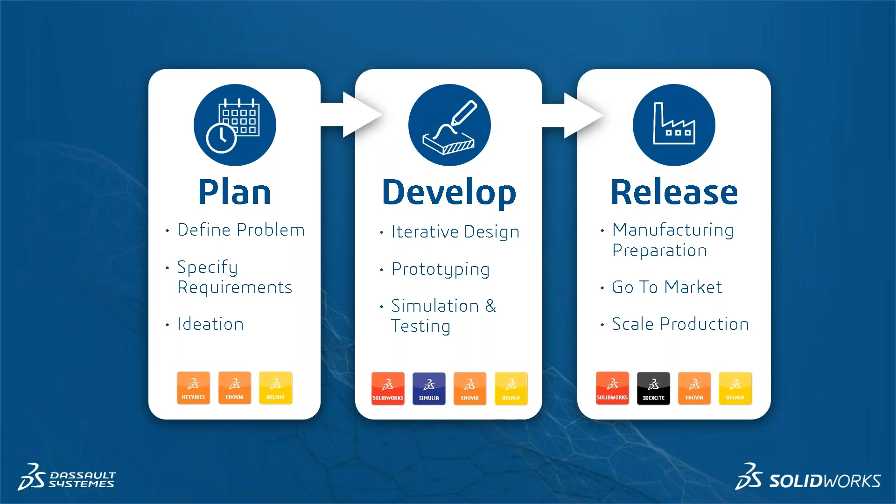So what does that product development process look like? In its simplest form, it's planning, developing, and releasing a product. We all know how well SOLIDWORKS tackles that second step by developing and iterating on your design. But as you see here, the other apps come together to fill in the gaps to provide a one-stop shop of connected solutions.

So today we'll be focusing on the SOLIDWORKS brand with emphasis on the release phase. Because as we prepare to go to market, we need nice, stunning promotional imagery, and we can create this imagery from our virtual designs made in SOLIDWORKS.

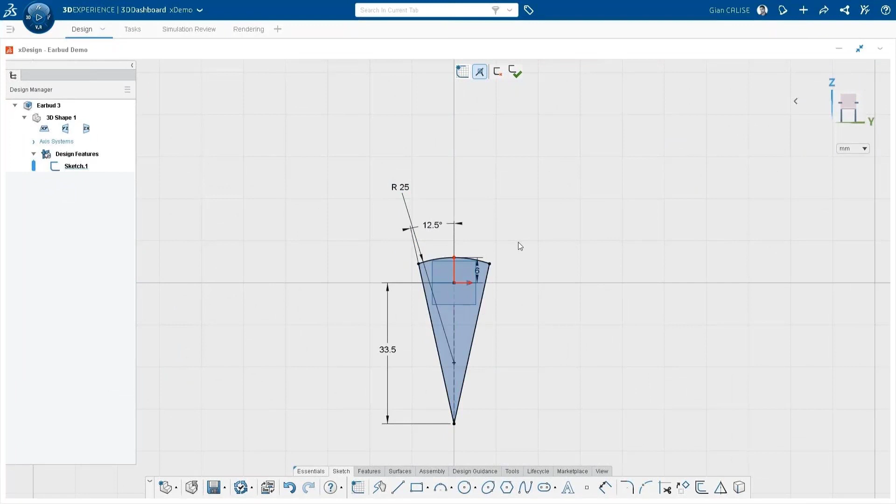So I'm going to start with the earbud itself, actually making the stem, I'll call it, of the earbud, that kind of elongated portion. I'm going to start by making a loft, using some of our basic sketch commands here. We have our three profiles to build our loft, and we're just going to grab those to put them in our dialog box. I just used a series of new planes and convert and offset entities to make that.

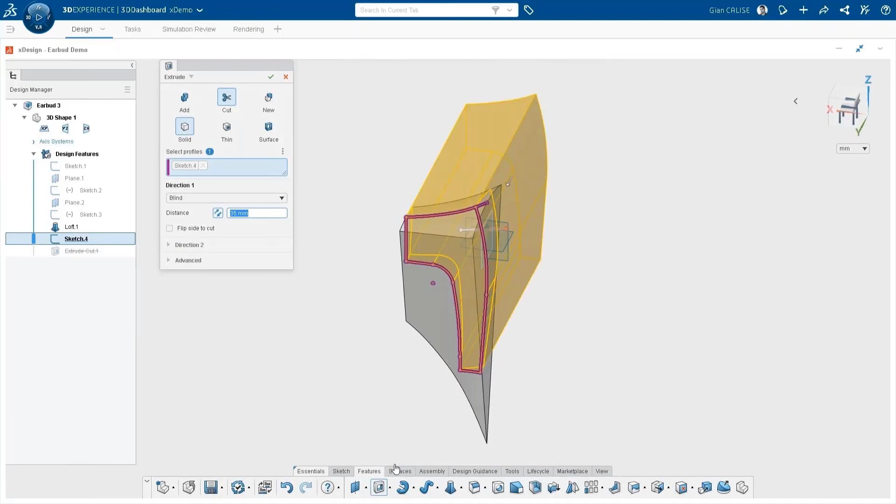Now another sketch just to cut away the outside. We're going pretty quick here, we just wanted to do a recap of what the design was really like, what it entailed.

For this design, I actually used XDesign for parametric modeling. I used some parametric features that you just saw to create the stem. Then I used X-Shape, our subdivision modeling tool, to create the bulb, I guess you could call it, or really the part of the earbud that needs to be a very nice organic surface that will fit into the ear very comfortably.

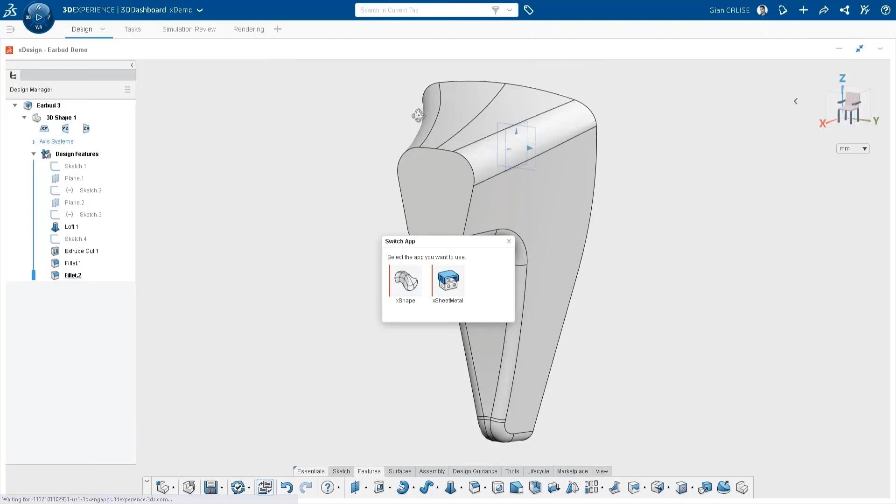Like Mike said, we covered a lot more of that design process in a previous webinar, but just showing you the basics right now. We start with primitive shapes in X-Shape. In this case, I start with the box. It's just inherently different than your typical parametric modeling, because now we're starting with 3D.

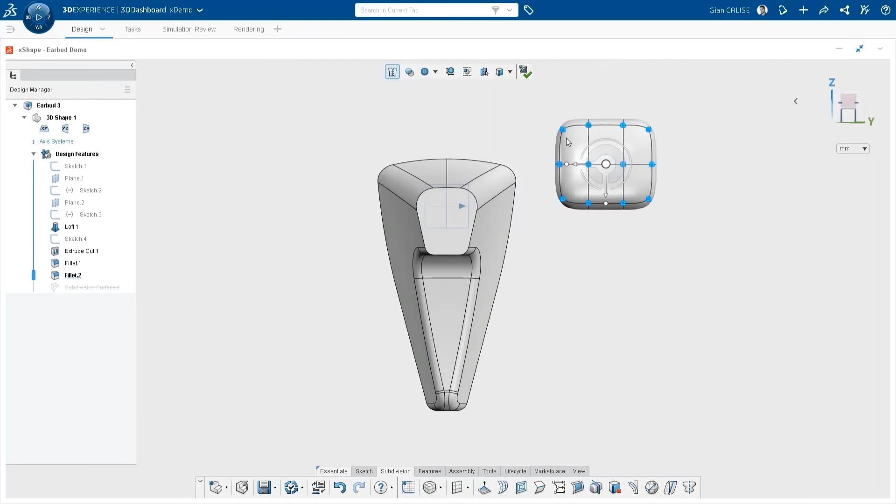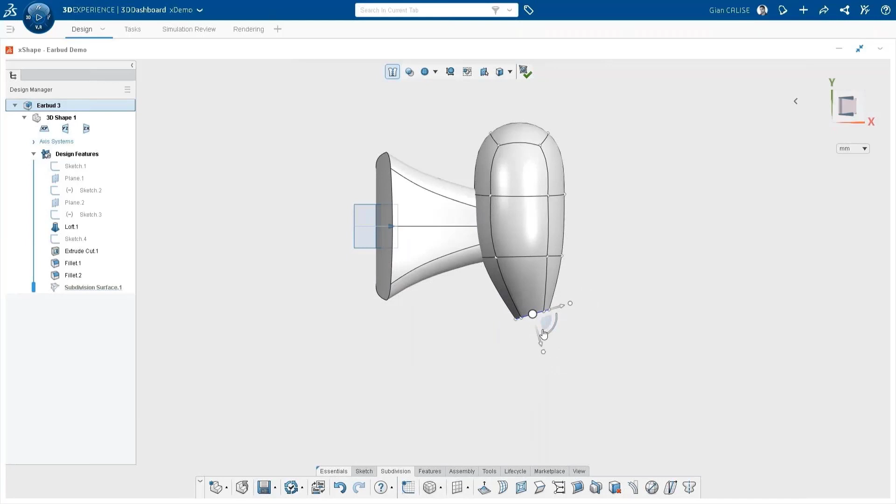We're just pushing and pulling to place different vertices, faces, and edges until we get the shape we're looking for, using that triad, or the robot, as we call it. We can adjust faces, edges, or points using that robot, and we use it to scale with those dots, and then to translate and rotate using the arrows and arcs you can see.

We can even adjust the orientation of that robot tool itself. You can grab the entire body. I'm just box selecting, window selecting here, and pushing and pulling little bits at a time. But that just about covers the X-Shape use in this.

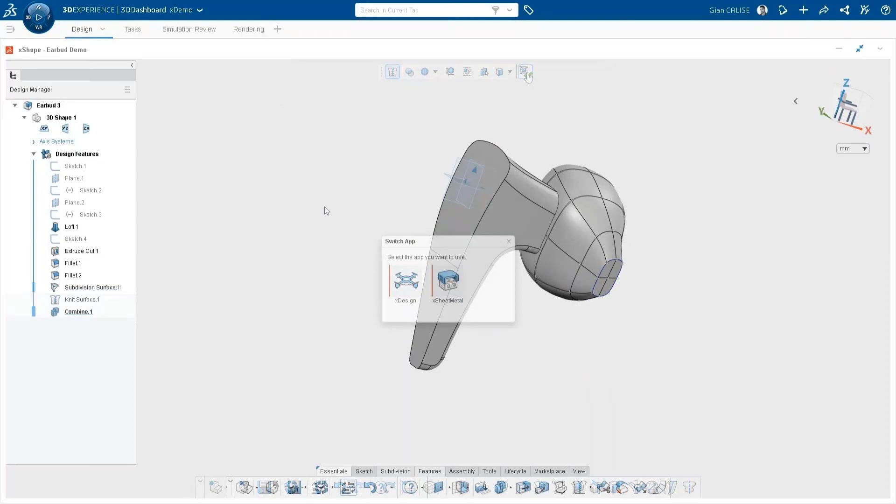So when we're ready to switch back to XDesign, now we're just combining these two bodies, a simple combine, just like in Desktop SolidWorks. Now I have one body, and I'm just going to soften up that edge between them with a fillet.

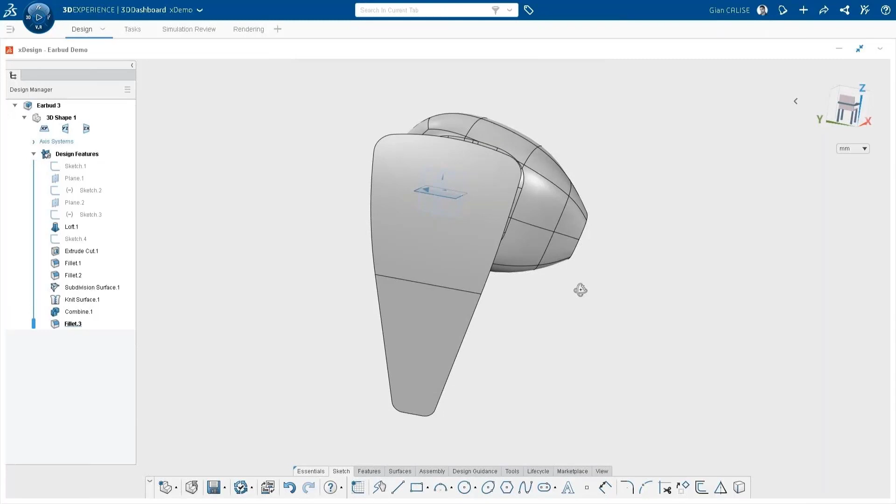That's really a high level overview of how we got this case to where it is. Now this isn't every single feature, we did add a couple more basic features that you'll see Mike use in the model, but this is where I pivoted to start on the case.

I actually used the earbud itself to design the case by bringing it into 3D Experience SolidWorks, and then using it as a reference when I wanted to create the insert for the case, the part of the case that the earbuds actually sit inside, nice and comfortably.

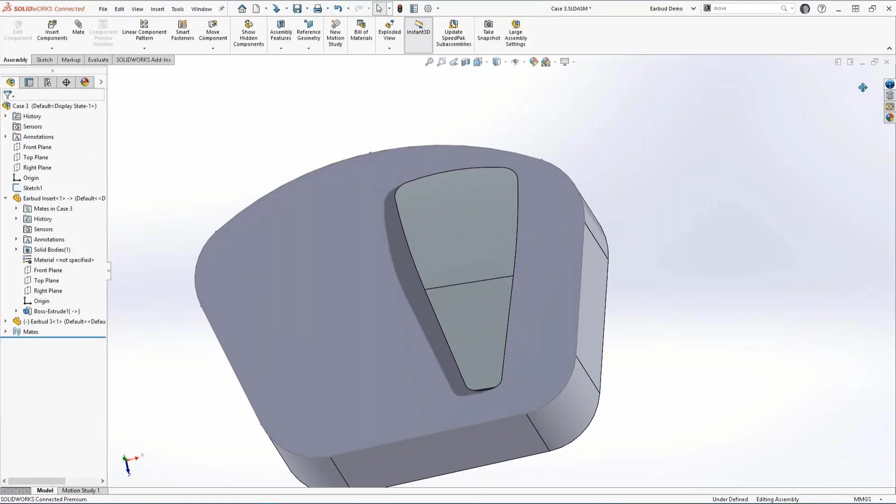We did that by bringing it in, and now just cutting using the surfaces of the earbud itself to drive our different features. And then in the case where we have kind of the top part, this top cut done, now we need to actually continue and cut down all the way to that bulb.

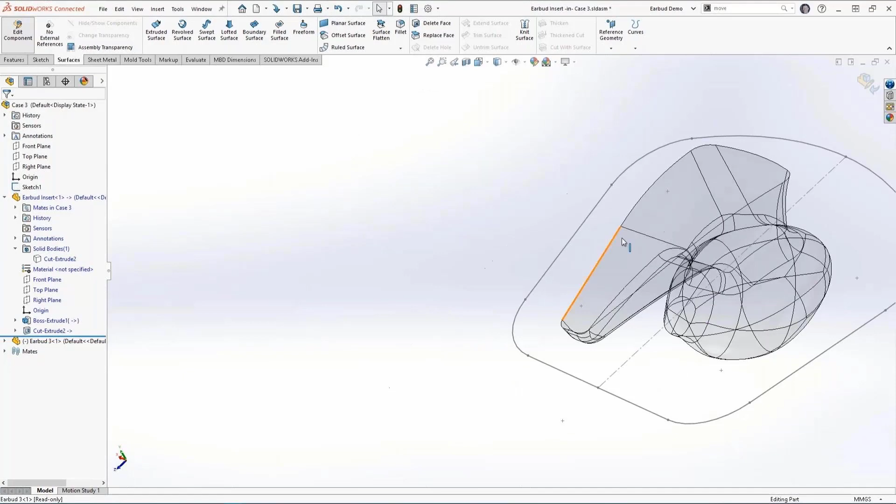But we don't need to cut the whole thing, so we're just going to create surfaces. We're going to use an offset surface on the earbud itself to define where our cut is going to go up to, our next cut, to create the insert that the earbud is going to sit in.

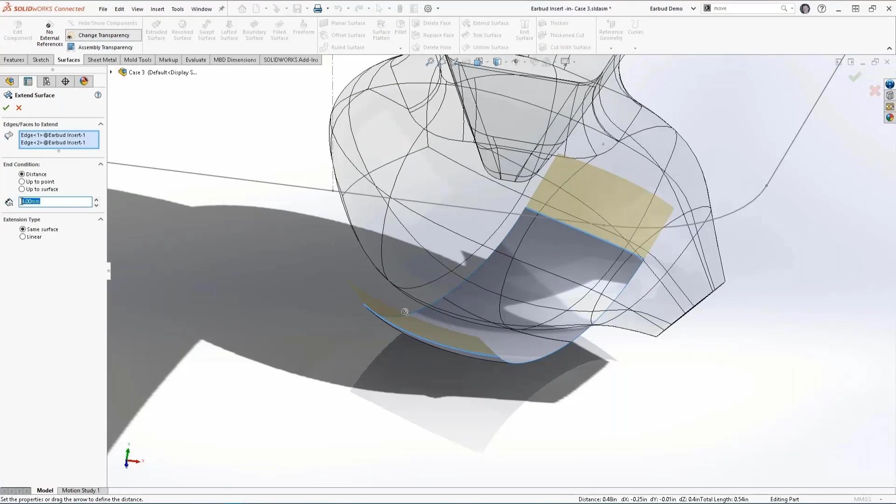So just manipulating this surface to get it to the point I need it to be. I want it to at least encompass the size of the top part of that earbud that we see selected right now in our selected contours for this cut. But now once I'm ready to use this surface, I have my cuts in there, and now I'm just softening up edges and adding final features.

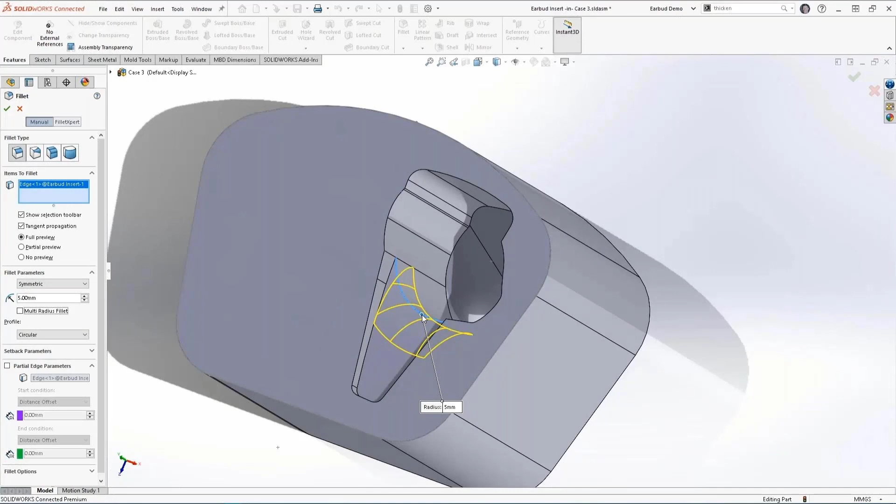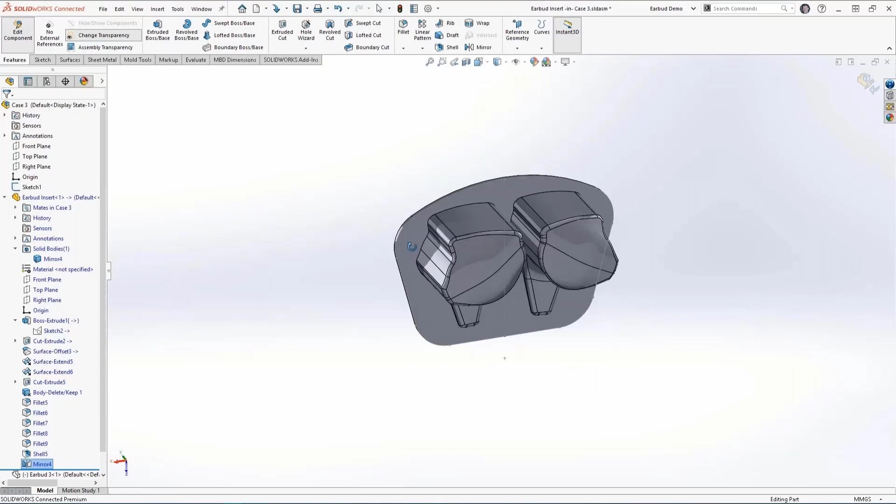That's just highlighting how we were able to use multiple different CAD tools in conjunction, in tandem, to come up with this final design that uses multiple different CAD products. And then we shell it out, we mirror it, and now we're well on our way to that case insert part where the earbuds are going to sit. This is my favorite part of making this model, was making that insert.

So let's fast forward, our case is done. We have the top and bottom pieces as well. Those are pretty simple - if you're a SolidWorks user, I'm sure you can imagine just how easy it was to make those. But I think now I'm done with this case.

So I'm ready to reach back out to my design team with Mike and John here, because we need some renders now. We need to put some content out there, some nice, cool imagery to generate some hype, some buzz around this new set of earbuds we're hitting the market with.

So I know John has color swatches, and I know Mike, he's the visualize expert here, so I'm going to see if he can handle that. Looks like John's got the first color swatch. We can see this in our collaborative community that we're interacting in. Looks like Mike's up for the challenge too, and now he has access to all the color swatches and everything he needs to get going on these renders. So Mike, how are you feeling? You think you got everything you need?

Oh, Mike, I think you might be muted.

There we go. I was just commenting, it's really fun to watch how that model came about - to see X Design, X Shape, which are part of those 3D Creator, 3D Sculptor roles, all through desktop, through the cloud application, so browser based, but yet bringing it back down, right? It's connected to the desktop ecosystem. And really that's what I wanted to hit on, right where you left off with your design and getting into the visualize connected side of things.

So as you mentioned, using the 3DSwym community that was created for this group, you tasked me with this. I was able to log in right away, get flagged saying hey, I got some work to do - and of course I'm excited to do it. So using SOLIDWORKS Visualize Connected, I actually launched that application right from the same place we launch all of these different applications. Some are browser-based, and in this case it's a desktop install, but connected to all the data that we have on the 3D experience.

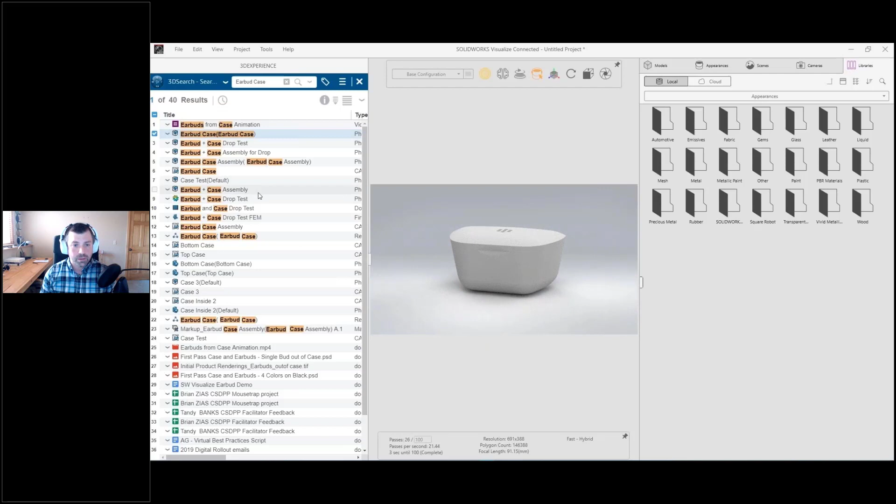So it really can save a lot of work for the guru who's doing the CAD stuff and rendering stuff - we can speed things up. So I'm going to go ahead and bring it in, and just like that, this looks good - looks like the right model. The next thing I want to point out is over on the 3D Experience side, you'll notice that the Visualize project is made, and it's created a reference to the CAD data itself.

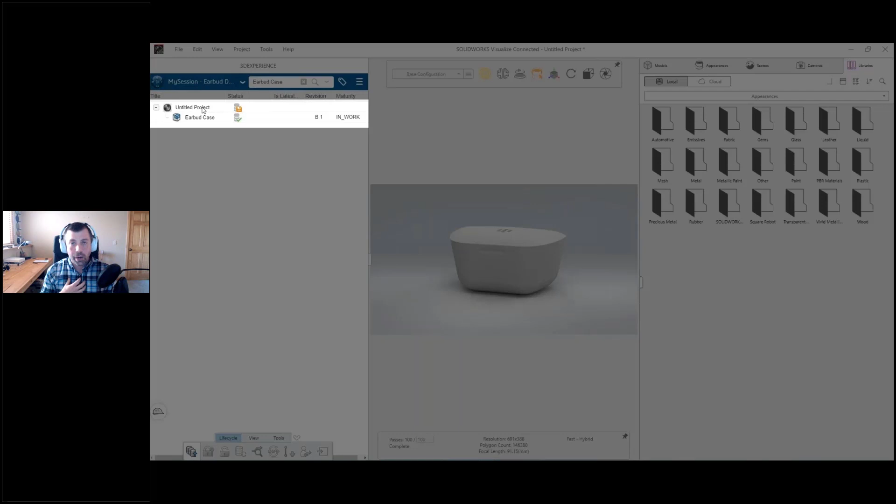What's nice about this is it still shows as in work here. So maybe we're close to that release stage, but not 100%. As you start to go through and modify the geometry, I would get notified as a Visualize user and see those updates.

I could update my project and bring in any of the geometry changes. So active reference right there. I'm going to go ahead and save this. Once we've done this, I'll fill out the save card and add a new comment into this revision. In this case, just new project.

So as we go through, even though I'm working on Visualize local to my machine, all that data is being pushed back up to the cloud, being backed up, safe, secure, and collaborative. We can share this with other users.

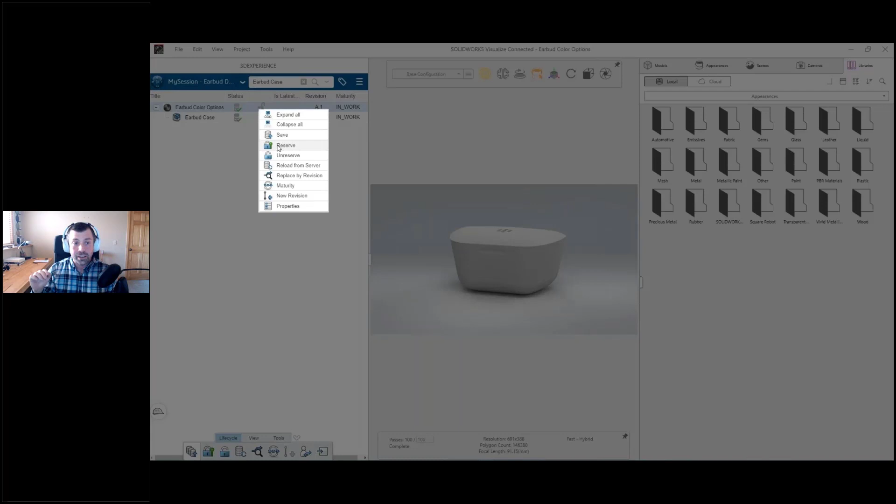Now, one more step here, just to make sure that John or Gian or anyone else doesn't get excited and jumps into my project, I'm going to reserve it. That just locks it, gives me only access to write. And this is the very same interface you would see with the SOLIDWORKS connected data set as well.

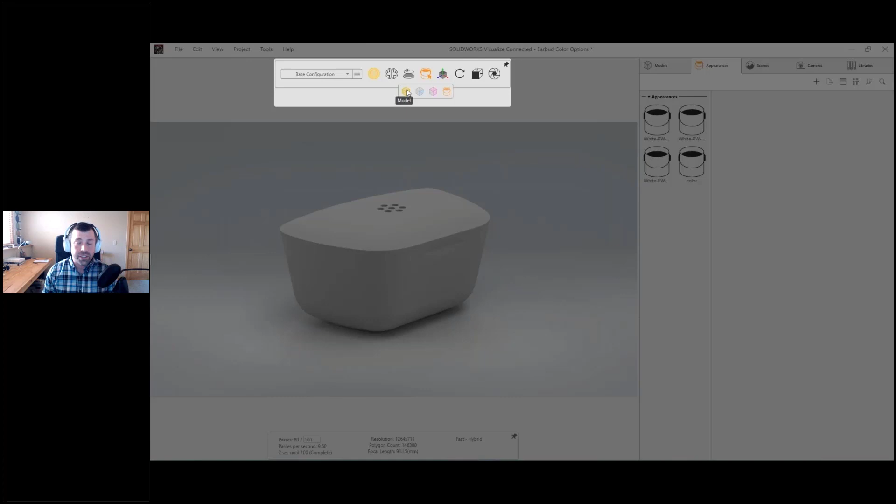So now I'm inside of Visualize. I want to point out a few things I use commonly. If you're new to Visualize Professional or Visualize in general, on the very top we've got our toolbar, and this is really the guts of the software itself.

I'm going to do things like grab models or parts, different groupings depending on how it's structured, or even the appearances, just by my selection tool. In this case, we want to grab the lid. I want to make sure that's open. I don't have to worry about constraints of mates or understanding the mates that were in there.

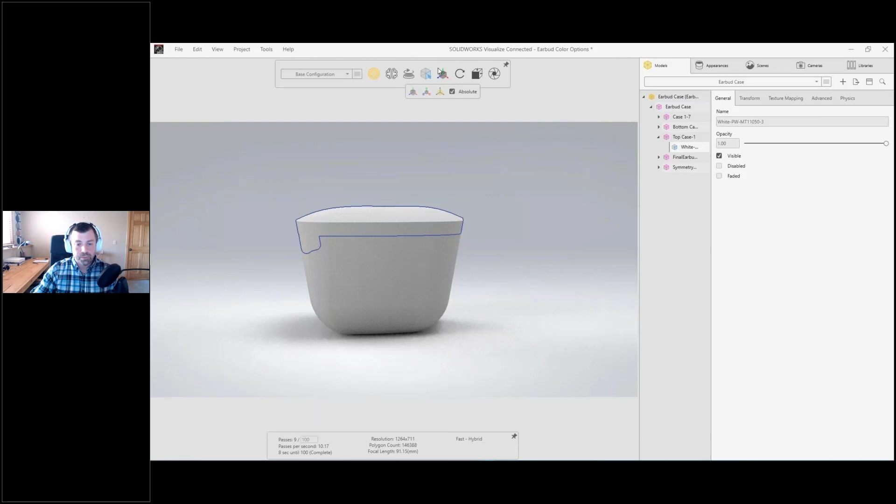A lot of folks that use this type of software may not have a CAD background, so things like just manipulating, just grab and move it. The other area of the software I use quite a bit is just the manipulator - things like translations, rotations, and scaling.

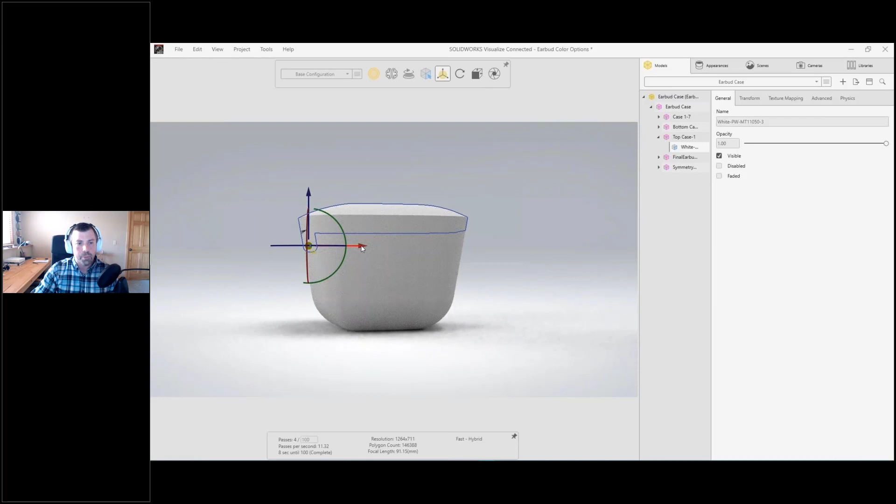In this case, we want to open the lid up. Now I've noticed that the spot where it thinks the middle is, is a little off - no big deal. We can actually reposition the pivot point, and that's what I'm going to do here: line that up right with where that hinge is, just like that. We can actually see the line, the hinge, or the cutout, and we'll just open it up, so just rotating the case open.

This looks pretty good. All right, so I've got that opened up. Now, next thing I want to do is just process some of the other CAD data.

I showed you guys the top toolbar. Over on the right-hand side, I'm working on the models tab, and I do a left to right approach. So I start with the model, and I start to see things like - Gian, you did a great job hitting a lot of these transitions, these fillets or rounds to smooth out the model, but there's a few that we still missed.

And this is really critical within rendering, because the human brain, if you see something in the real world that doesn't quite fit, we all say, well, it's a glitch in the matrix, right? It's your brain saying that's not right. And perfectly sharp edges like this are one of those triggers.

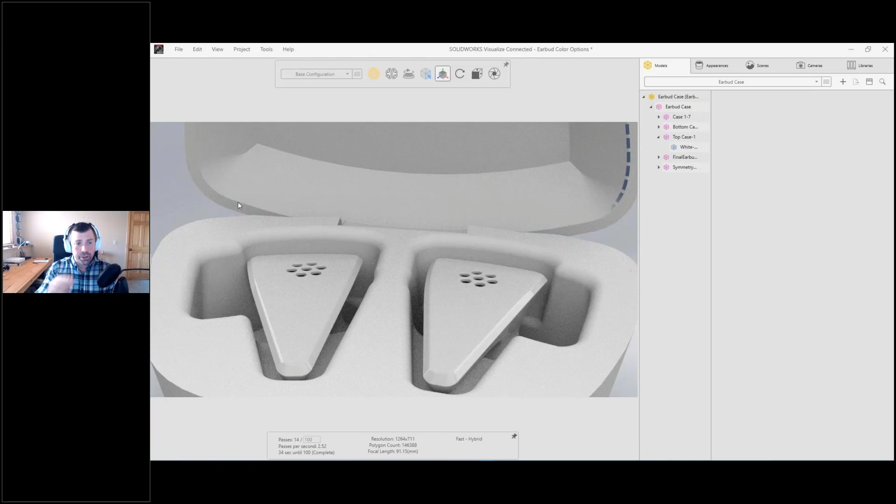So I like to soften those up, and I love this in Visualize. I don't need to go bug Gian to say, hey, can you add a fillet there? That's affecting the production model. No, what we're gonna do is just round that out and do that right inside of the rendering software - one-way bridge, we don't have to worry about affecting the CAD data. We can do that here.

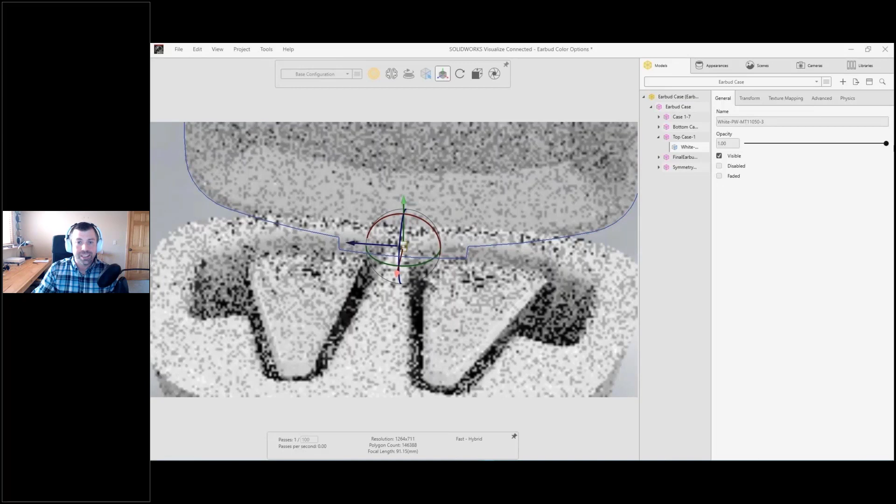But before we do so, I just want to show you on the right-hand side there are other ways you can modify the model - things like changing the opacity, so we can have that kind of ghosted out, a really cool effect if you want to do some transparency views and look inside of complex components. Standard transformations too, just things like rotating the model around, translating it - these are all built right into a quick UI.

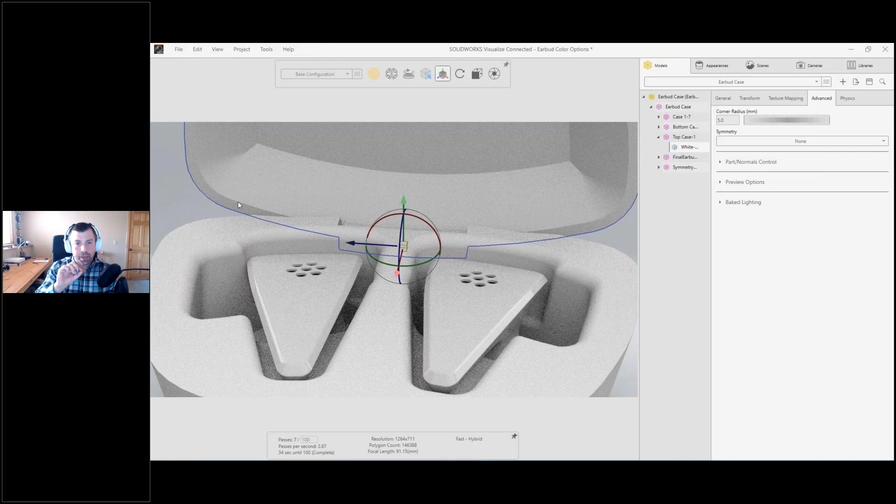Going back to that sharp edge, Visualize Connected allows this corner radius, and this is a great tool. It's a real subtle break that I put to that edge, but it just softens it up. I'll do that on a couple of the components. Here, we'll just go ahead and do another break to the overall inside of the case. And then finally, we'll make sure we're softening up the earbud itself. So again, modify geometry inside of Visualize, and you don't have to worry about bugging Gian or the model or any of that.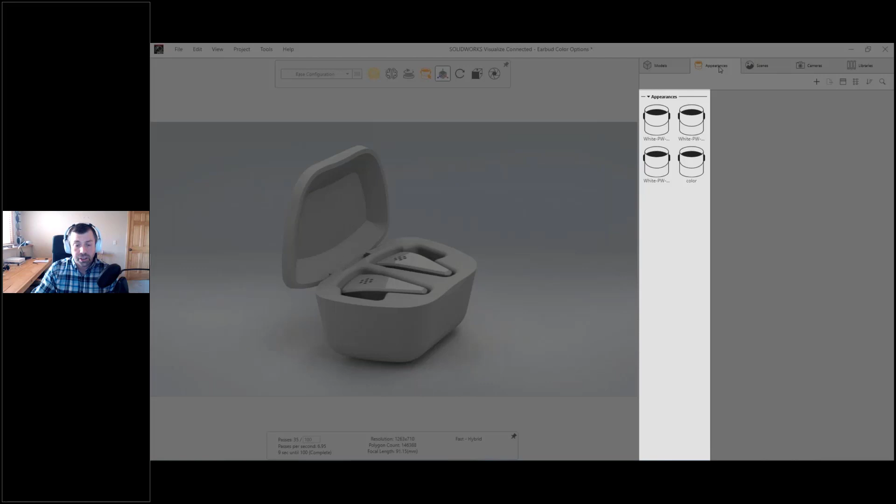Next thing we'll look at is on the appearances side of things. I actually have imported all of the appearances that were created when the model was done over in SolidWorks. We've got some mold tech finishes here, so that's a good starting place. You can either use these as is, maybe they're 100% approved materials, or you can modify them on the fly. So we'll do a nice little SolidWorks red to the case cover here. That's a good starting place.

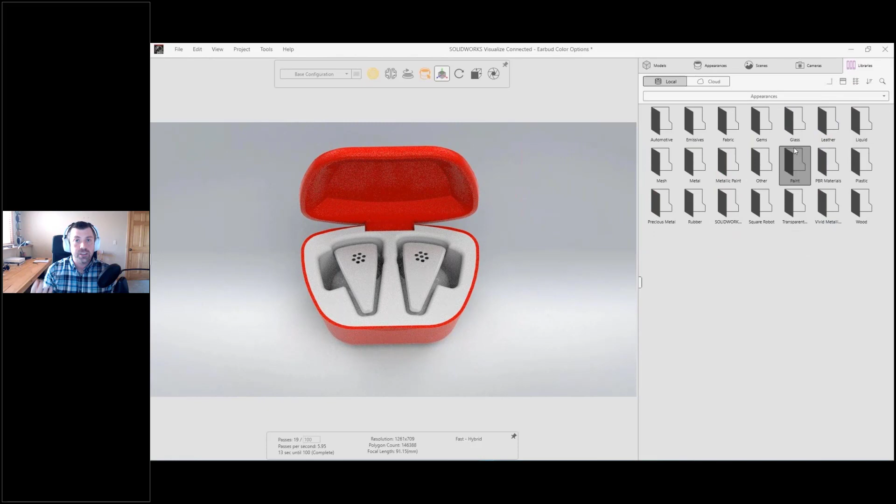The other area you can use is the material libraries from the default installation. It comes with a ton of different materials that you can add, customize, or use as is. In my plastics folder, we see we've got a bunch right here, I don't know, 50, 60 some materials in there. Application of these is just a simple drag and drop. Now, these plastics will actually have the color, they have a highlight color, they can have transparency to them. So they're pretty advanced materials, and they're specific to rendering, how light moves through them, how it bounces off of them, and so on.

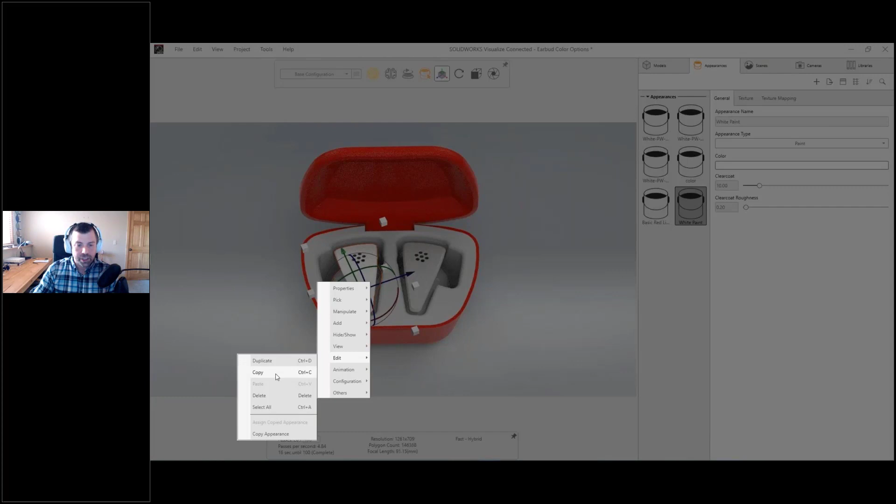So I'm gonna apply this new red paint. That looks pretty good. Let's go back, let's apply a few more. I'm gonna give the actual headphone itself, the earbud, a real nice white paint to it. And then I'm just gonna repurpose that. We'll copy that from one and we'll paste that onto the other, apply that appearance onto another one.

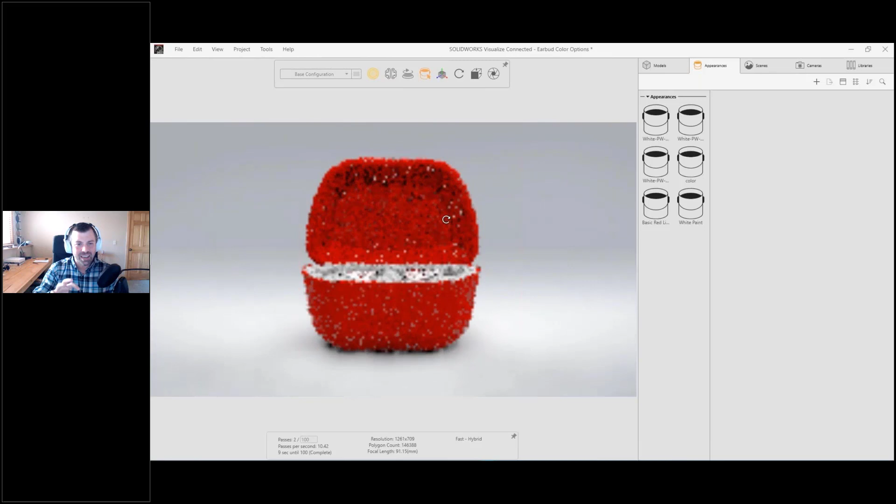And what Visualize does here, it actually will group those appearances together, and this is pretty slick. So once we have those appearances applied, it could be on two, four, however many parts of the model, I can always come back and just modify the color, the clear coat roughness, the clear coat thickness, or any of those aesthetics, on the fly. Get that all set up, and pretty quick, we're pretty much right around our way.

All right, the last place I want to go through in the setup process is adding some branding. Now, again, I mentioned that if this was done in the CAD stage, so Gian, if you would have not been so lazy and added the decal, we would have brought that right in. Just kidding, my bad. We can do it here as well.

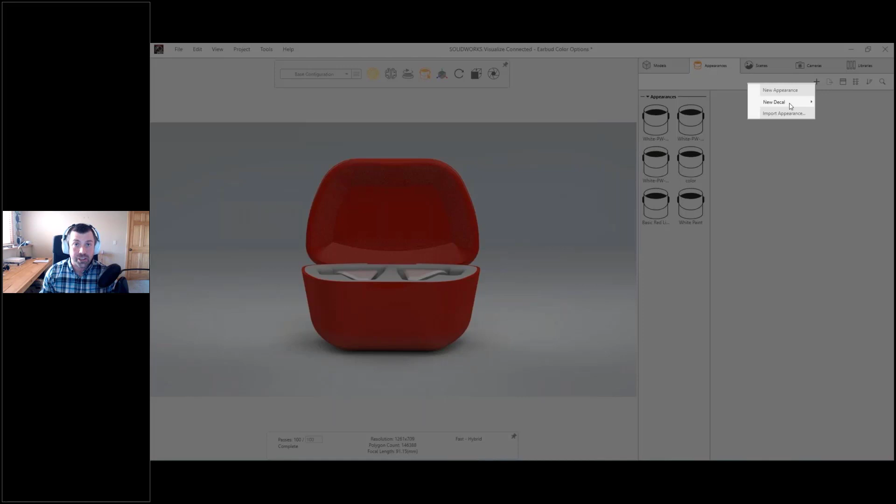So I can go through right inside of Visualize. We can add decals, and decals can be static images, they can actually be animations. So you could put an image up on like a cell phone working or so on. But we'll slap on just a little PNG, drag and drop, place this in the position, and we'll move that triad to get it positioned right where we want it to be.

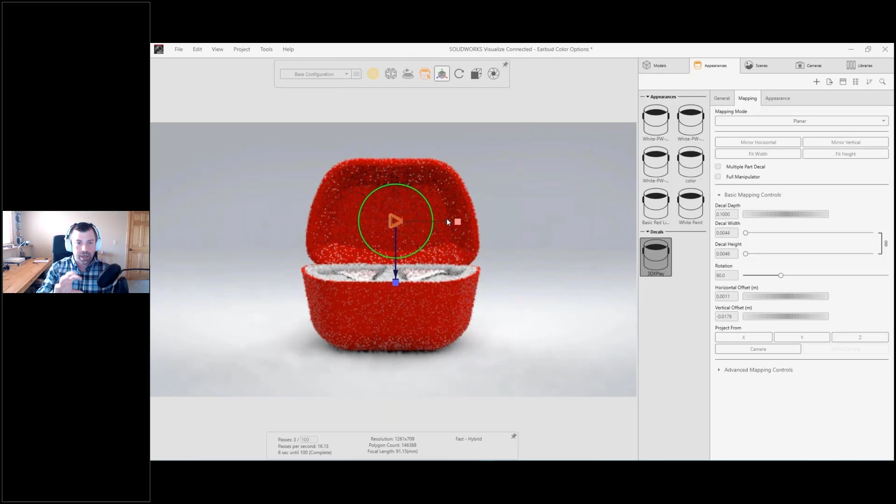All right, so let's scale this down a little bit. Again, just nice user interface. And I didn't point this out, but you'll notice that it's kind of pixelating as I modify it. This is because we're actually rendering in real time. So as I make changes to it, as I make adjustments to the model, Visualize is giving me direct feedback of what's going on.

Okay, let's go back over to the right-hand side, and you'll notice I've just moved myself left to right. I started with the model, modified some things, we opened it up, softened the edges, we applied some appearances. Next, we want to modify the scene, and this is really that virtual photo studio that we're working in. The scene that we have here was brought across from SOLIDWORKS. If you're a CAD user out there, you may recognize the scene. Oh yeah, that's how I design in CAD. Great, that comes across as well, and it's a good starting place.

You can also modify these. So what I'll start to do is come through and take out that backplate, which is just a standard image in the background.

We can modify things like the brightness. You can rotate the scenes. These scenes, or environments, have lights in them, and we can reposition the location of those lights just by rotating around, to really light up our product that we're going to be creating a rendering of.

One thing I like to go through, especially in product photography, is get rid of that 3D type effect and get just a solid color in the background. But you'll notice things like shadowing and floor reflections are all applied.

Visualize Connected out of the box comes with a bunch of different environments or scenes. Here, we could do a blurred studio, which gives a nice soft effect, drag and drop. These types of scenes are readily available online, with tons of websites where you can download them for free or pay for them.

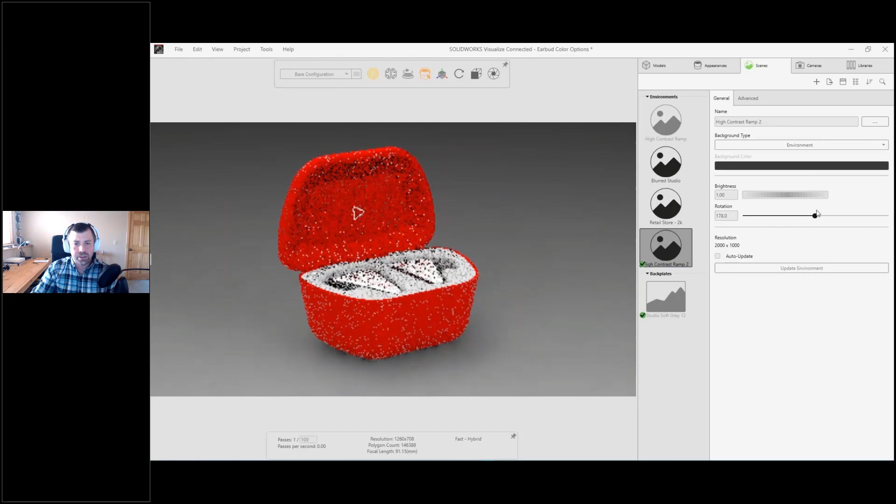Now I'm going to go back, and on that scenes tab, you'll notice as I apply them, those scenes all get remembered and added to the project. But I'm going to use this final one. I like that high contrast. We'll rotate that into position, and again we'll use that dark background to really make this pop.

I'll add a little floor reflection. So just going through some of the options in here. If you don't know what they are, no big deal - just slide things around. You're going to get feedback from the real-time rendering and see how that affects your overall image.

Now, the scenes aren't always going to be the perfect lighting, and as any photographer will tell you, it's all about good lighting. So one thing I love about Visualize Connected is you can create all these additional lights to your scenes, and it's really easy to do.

In this case, I want to add a little bit of light to that back case, almost where the branding is. But instead of manipulating and moving it, all I'm going to do is say, hey, pick target, and click on the face I want to light up. So as I select that, it puts a light out in space somewhere, boom, and it fires it in and lights up that face - just normal to, gives this really nice effect.

You can modify the size and style of lighting, the overall geometry. I like to use a long cylinder light - I think it gives a nice effect. That's just me playing around. Looks good, I love it. And pretty quick, we're ready to go.

So I grabbed Jian's model through 3DEXPERIENCE, brought it in, modified some of the geometry, added some appearances, created a light, applied a scene, and we did that all pretty quick. This is as real time as it gets.

So now I'm going to go ahead and save this - I want to make sure we got a good saving point. You'll notice I also have the release reservation after save option. Maybe I'm done for the day, headed out, and we want someone else to have access. We can do that, which I do here.

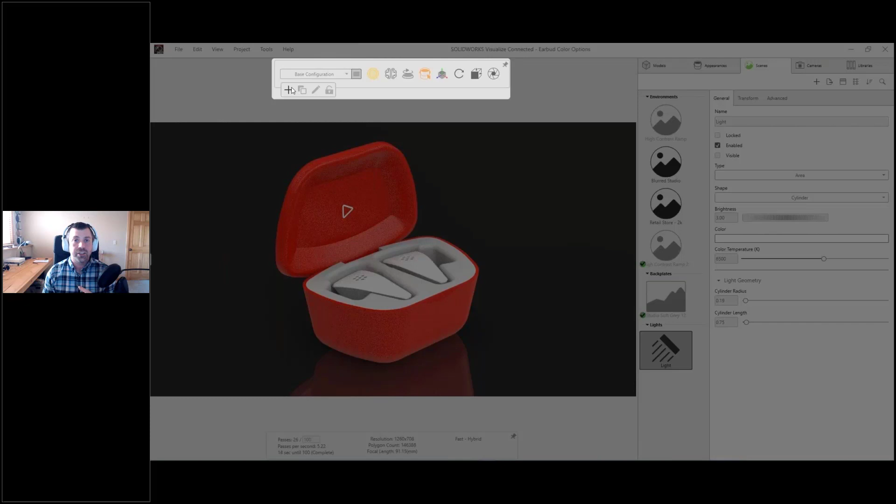And in this case, John, you provided me all the swatches I need, which is great. But maybe early in the design phase, or if you're communicating with your customers on the look and feel, this could be more than just colors - this could also be textures, transparencies, decal placements. All of those things can be done with these if-then configurations.

So let's create a few. I'm going to do a gray one, and then I'm just going to do a blue one as well. So we're just giving those a name. I use the GRAY spelling, sometimes I use EY spelling. I have no rhyme or reason.

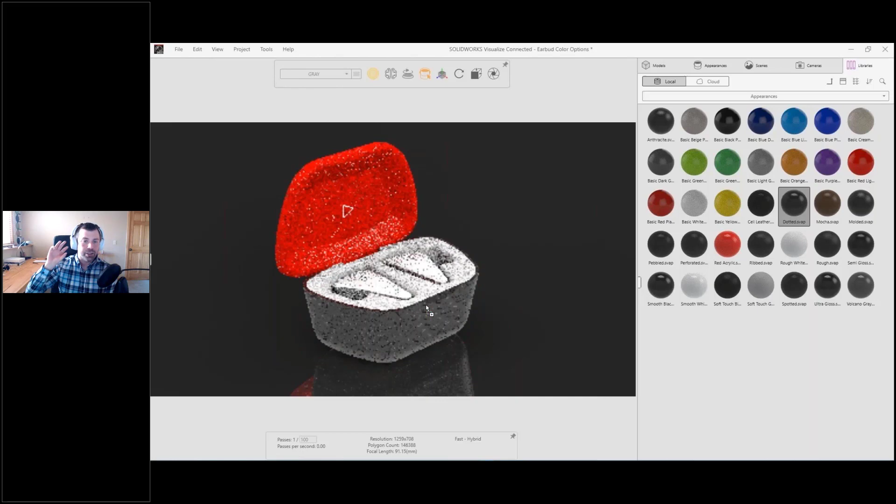From there, we're going to change this to gray and start off in my material library, same place we were earlier. Now I see a dotted one, but this is black. No big deal. You can use the library as a starting point, bring it in, and check this out.

I love this look because it's actually got like a 3D texture to it. Visualize fully supports displacement mapping, even what we call PBR textures, really advanced materials. We can use those in here as a starting point and modify that. I think this looks good, but it was outside of the scope of the work.

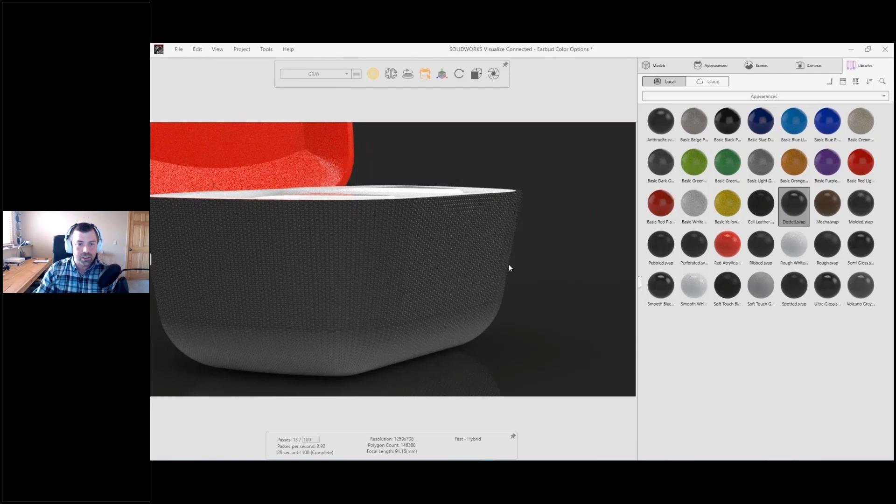So let's continue shopping for materials. That's what you're doing, you're just applying it. Does it look good? Do I like it? Drag and drop, finding something you like. So this volcano gray, I think, is a good fit. And again, that's going to be the color, but also the roughness of the model, the reflectivity of the model. All of those go into that appearance.

Now, in this case, let's go back over and we'll apply a little bit of a cotton to this, and then we'll jump up and switch over to my configuration. It looks like I lost a shadow box there. No big deal, apologize for that.

Now, what I want to do is, we all know how important branding is in terms of colors. If you have ever worked with anyone in marketing, they are very particular in making sure that RGB, that hex value, the CMYK value, Pantone, for any of those things, those numbers have to be precise.

So what I'll do is actually search in 3DEXPERIENCE, that task pane, bring this out, and we'll look for that posting information that John had posted earlier. You saw the full SolidWorks, the Dassault Systèmes brand colors.

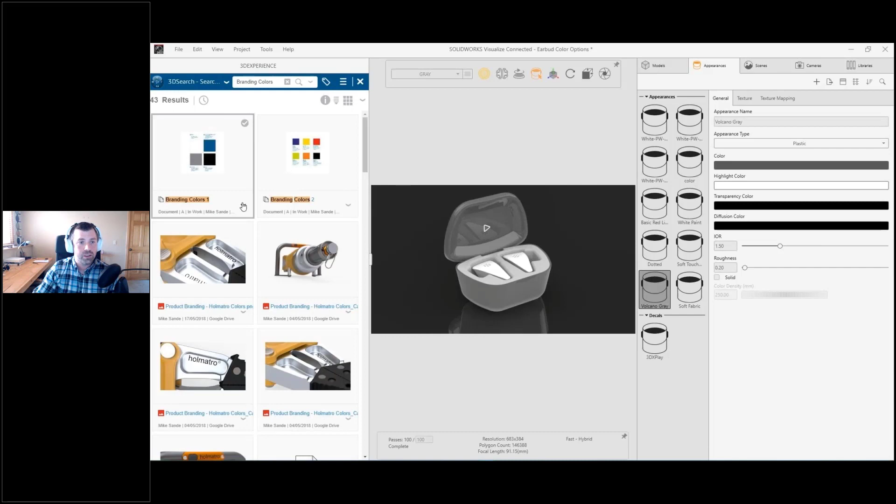So I've got 2 of the swatches. We'll go into the branding colors. I'm going to preview this. So again, non-CAD data is searchable, accessible right through the same pane. And I could grab the values, the CMYK values right from here. Or one of my favorite features inside of here is just using the little color dropper. We'll just extract that right from there. It saves me time, and I get that exact value.

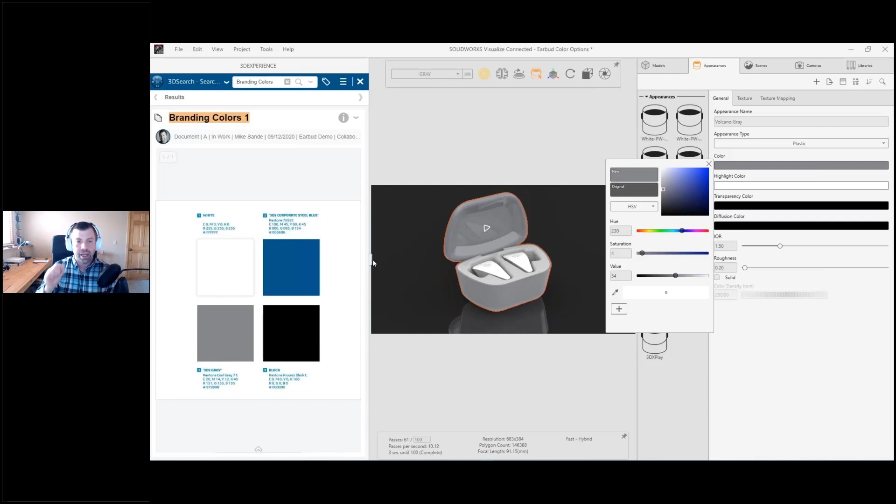So we'll go ahead and maybe grab the blue. Let's see what the black... Well, we wanted that gray, which is a little lighter than the volcano gray we had before. Let's toggle through. I've got 2 configurations created now.

We want to do 1 more. We'll just repeat the process. I'll bring in a blue. I could bring in any one of these, it doesn't matter, but I like that shininess of the blue. We'll extract out the right value of that blue. And now we can toggle through and see I've got all my configurations, and rinse and repeat. 5, 10, 100 of these, all stored in that project.

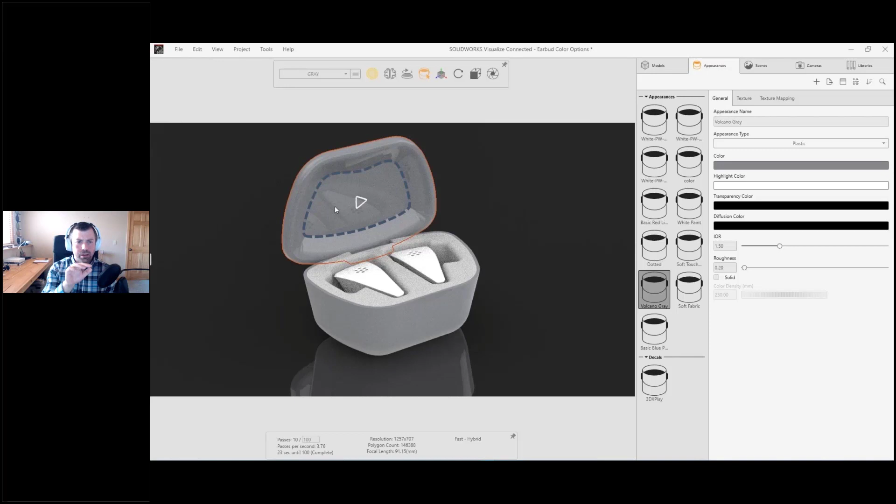Now going through, I did notice here that it has a little reflection inside of the model. I don't love it, so what I'll do is actually modify that just a little bit. Again, real-time rendering, just change the roughness. Think of this as going to it with like a 500 or 800 grit sandpaper just to soften that up a little bit. Going up to 1,000, we could polish it and so on.

That looks right. Okay, so we moved through models, appearances, the scenes. Now let's look at cameras. This is really where you bring that artistic fun of it. You can really start to be creative.

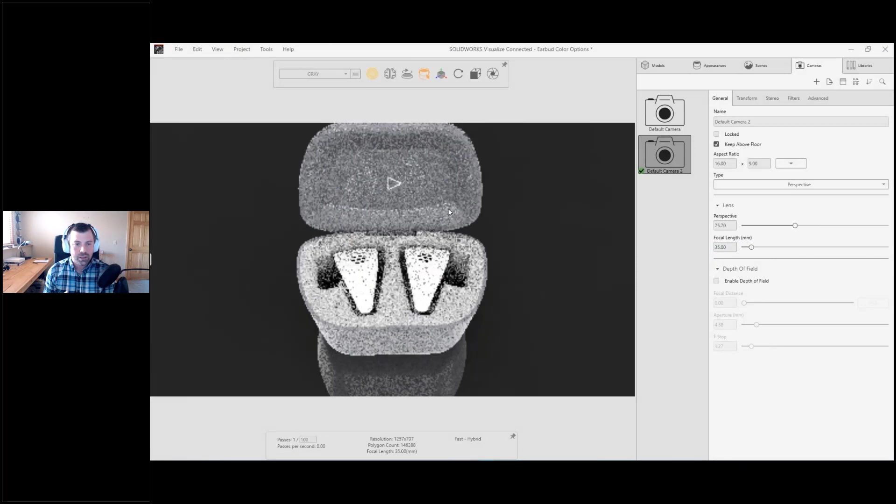And if you're not creative, a lot of folks out there who do this stuff say, I'm just not a creative person. No big deal, because you can take real-time rendering, move things around. What looks good, what doesn't? So here, when we come in, we'll get our top view, and I'm just going to start creating a bunch of cameras. I like that one.

I've created a wide angle lens, a 35 millimeter, just put that right in there. Again, slider bars, another way. Start moving around the CAD model. What looks good? In this case, let's go ahead and get a nice render shot of some branding.

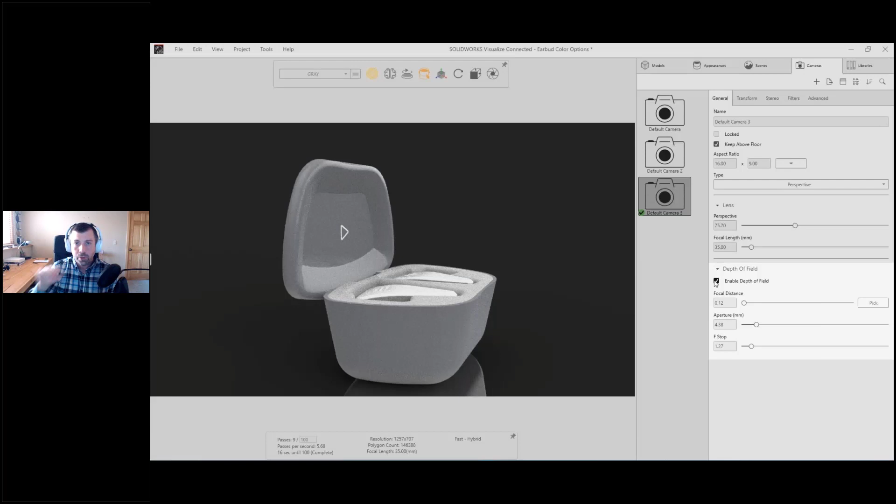Things like depth of field are included with Visualize Connected. This will blur the fore and aft ground and really focus your end viewer's eye right where you want them to. So I'll click on that focus point, puts that right into sharp focus, and we're looking pretty good.

So I'm going to switch back over to my session, and let's go ahead and make a save. I think this looks pretty far along.

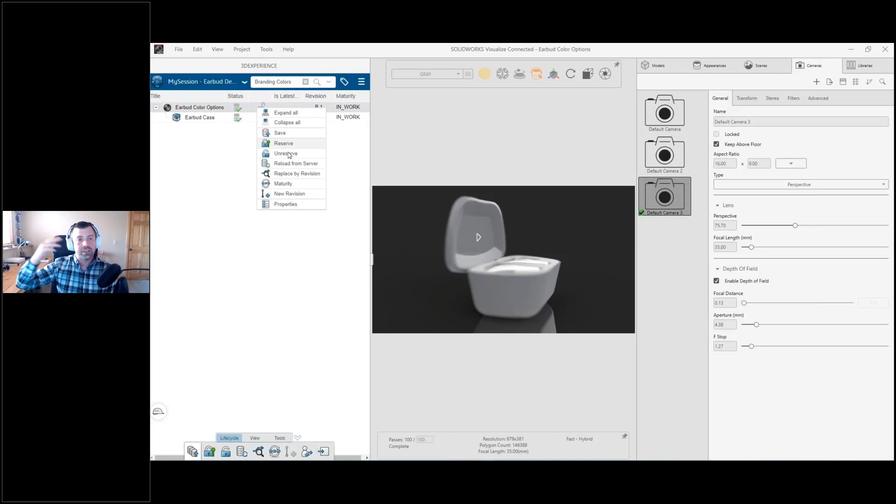We've got a bunch of cameras. I've got 3 configuration options. I could have kept going and included all of the branding ones as needed. And we'll add a revision comment to this one. What I'm doing on this project is creating revisions of it. This gives me a space I can always roll back to if I need to branch off into a new direction. It's just the way that I'm managing my project.

All right, let's go into create a new camera. So I'm going to do another camera here. I've got 4 cameras now. In this case, we want to bring the earbud out. We talked about the manipulation tool earlier, right-click menu as well. All of these commands are really easy to find, even if you're brand new to Visualize.

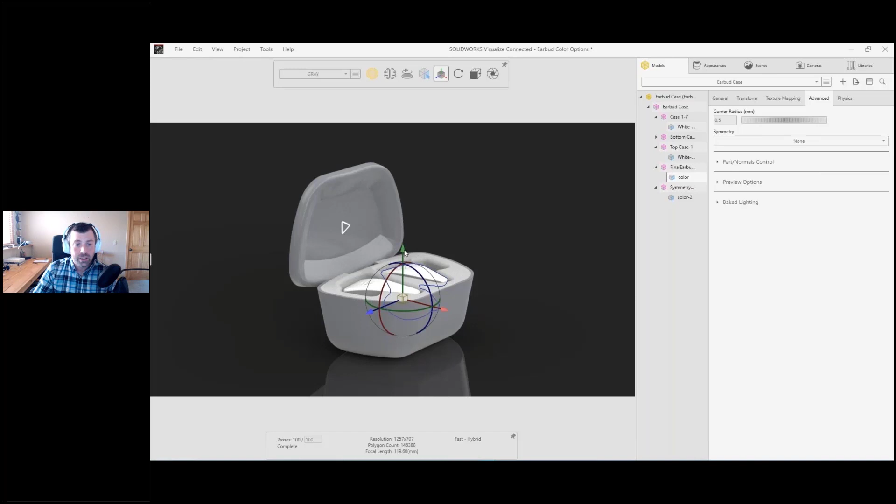So we'll bring this up. Let's rotate that in a little bit. And what I want to do is actually give a little shout out to the awesome design of the earbud itself. So far it's just been what they look like in the case. So that looks pretty good. And we'll just kind of tweak that. A lot of fine tuning as you can tell.

And then we'll go through and let's add a little depth of field. Again, blurs everything out. Let's sharpen right on the earbud. Now, when I was doing this, I noticed it seemed a little dull to me. And I thought, well, it would be great to give Gian feedback and say, can we do like an LED?

So maybe in the actual design process, if this was a real production model, this would be a perfect time to crack open Visualize and do some if-then statements on that visual simulation. What would it look like to actually render out some lighting in there? That's what I want to get to here.

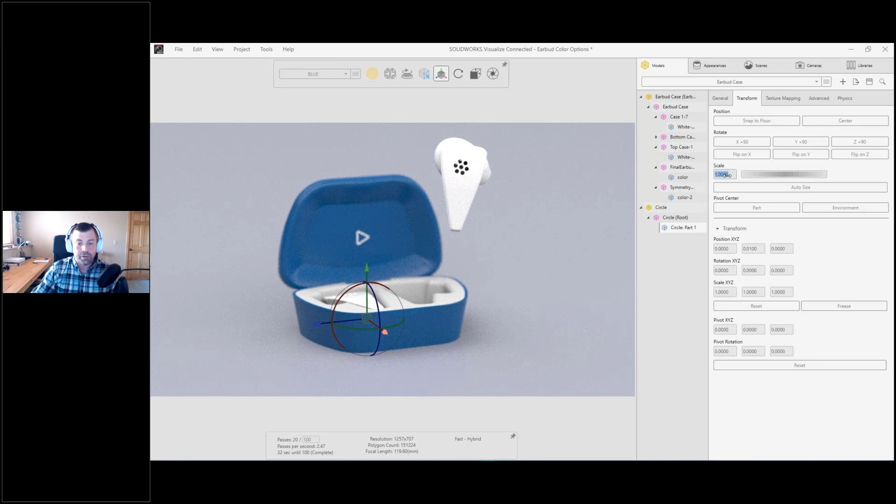Looks good with the blue, but instead of bugging Gian and asking him to send me a new model with some geometry inside, Visualize Connected actually allows users to create these primitive shapes, and there's a whole library of them. In this case, I'm just going to do a circle primitive. We'll slap that in, brings in a real big one. No big deal. We'll select that primitive, and then we'll go through and actually scale that down, do about 1% of that size.

Good guess. Let's go ahead and translate this, move that into position. And again, just sliders, no mates, no constraints with that stuff. I can just push and pull as needed, kind of like we do with the Xshape, just to get it in the right spot.

And now I'm going to apply an appearance to that. We'll use the emissives folder. Here's where we have all of our lights. I've got a nice 8,000 Kelvin xenon light in there. We'll just drag and drop that right onto that primitive model, and then do things like modify the color.

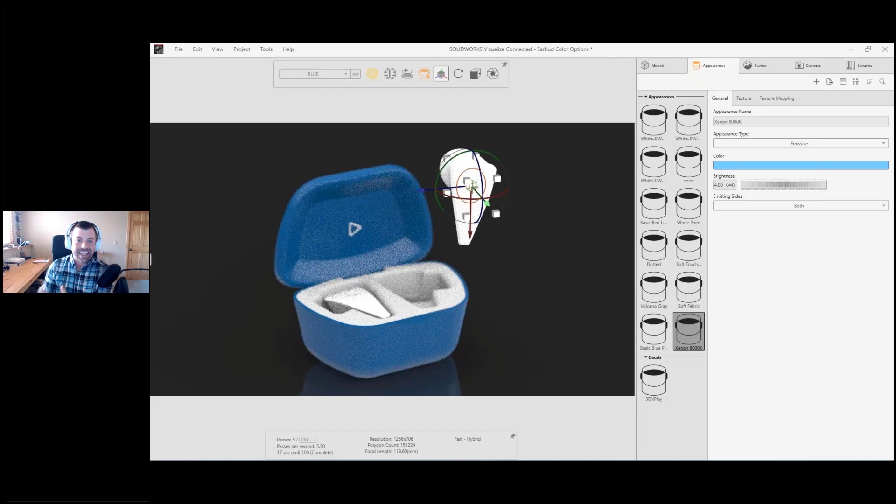Now, everything we've done at this point has been exterior lighting, shining in. It's calculating how it's reflecting off those materials and coming back to our eye. Now we've introduced an actual light source inside of the CAD model, and it uses an actual physical rendering engine that calculates how that light moves through.

So we'll change things like the brightness. We'll go ahead and modify the location and color. And then finally, Visualize Connected allows for bloom. This just gives that kind of halo effect that you see with lighting. If you have more of a humid area, you're going to get that overall look and feel to it. Really, really kind of puts that professional touch onto lights.

So we've applied a piece of geometry. Again, we're not pushing back. Maybe this again is going to be into that design phase of things, the design review phase. We're throwing out ideas, or maybe our vendor hasn't sent us the new PCB that goes inside of here. We can still create some of that geometry right in Visualize.

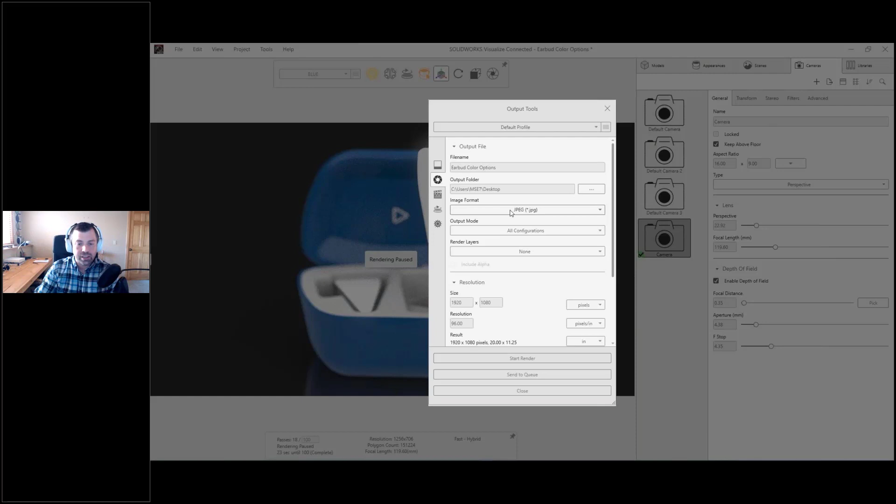Now it's time to render. I'm going to create some static images. We have standard image formats supported, PSD files are supported. I usually work with just a PNG file.

We support alpha channels, which is just giving transparency to the background. This is if you're going to do any post-processing, and in this case I'll bring them into PowerPoint to create kind of a layout.

Visualize lets me stack up all my configurations and all my cameras. I can say, hey, grab all the cameras I created, in this case 4. It could be 40, who knows? And it'll put those all ready for me in a nice queue.

And that's what I'll do is I'll queue these up. I want to keep working, keep adding stuff to the queue. Then when I go to lunch, we'll hit the go button on that queue, and we can start rendering stuff out when we're having a sandwich.

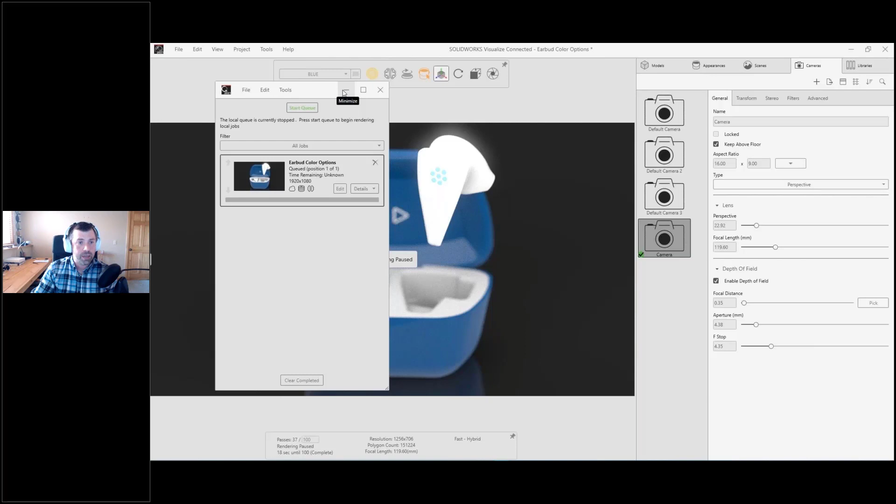So let's go ahead and minimize that. Let's come back over, let's make sure we're doing our due diligence on saving this model up to the cloud. Again, I like to rev this. We'll put this in a new revision, no big deal, and make sure we're still working on it as we reserve it.

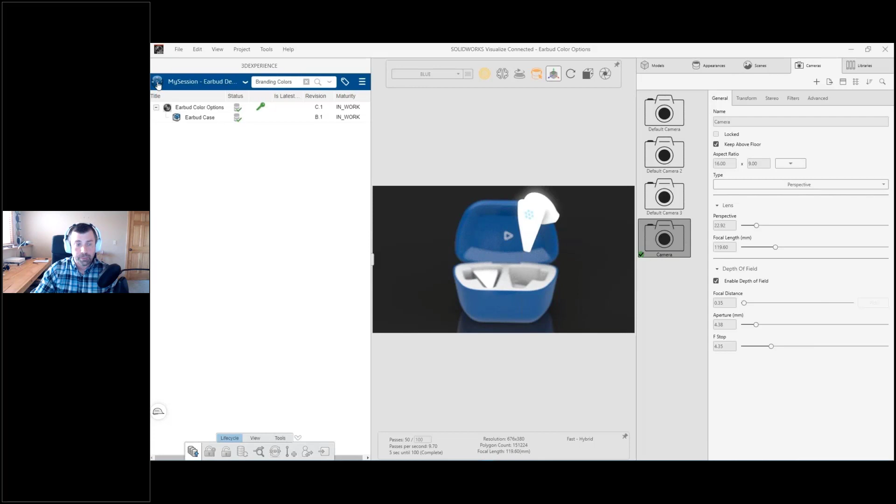Now I want to go ahead and share this over on that 3DSwym community so I can access all of the apps and widgets and roles that we've seen in past webinars right from here. So if I enable the compass, I'll bring that open, and then I'm actually going to go back over to 3DSwym, back over our team community, and we'll make a post here with these images.

So just added, hey guys, check these out, uploaded that into here. We'll go ahead and save this, and pretty quick, accessing the data, applying some materials, creating some cameras, moving some stuff around, running these all out.

We got a really cool proposal. Again, this could be customer facing, this could be marketing content for the web, digital catalog, social for Instagram, Facebook. Those are always hard to feed. Or this could be earlier on the design review. Which direction do we want to go with the stylings? Do we like the looks of the earbud?

Gian, I love it. I think it looks great. Thanks, Mike. Let's go one more step.

I wanted to go extra credit. That was the task that John and Gian threw at me, but I wanted to see if we could create an animation as well and actually put it up on the SOLIDWORKS Instagram account. So if you guys want to get ahead of me, and if you're not following SOLIDWORKS on Instagram, jump on there. We posted this animation, but I'll show you how I made it because this is a really easy process.

All the work is done. Everything up to this point, appearances, positioning, all of that we've done. Now it's just open the timeline up. Again, this is Viz Connected, comes with animation capabilities.

I'm going to say, let's go about a 9-10 second animation timeline. And I'll move my second, sorry, the yellow bar at the bottom to where I want to start creating keyframes. Keyframes, very standard way to create animations.

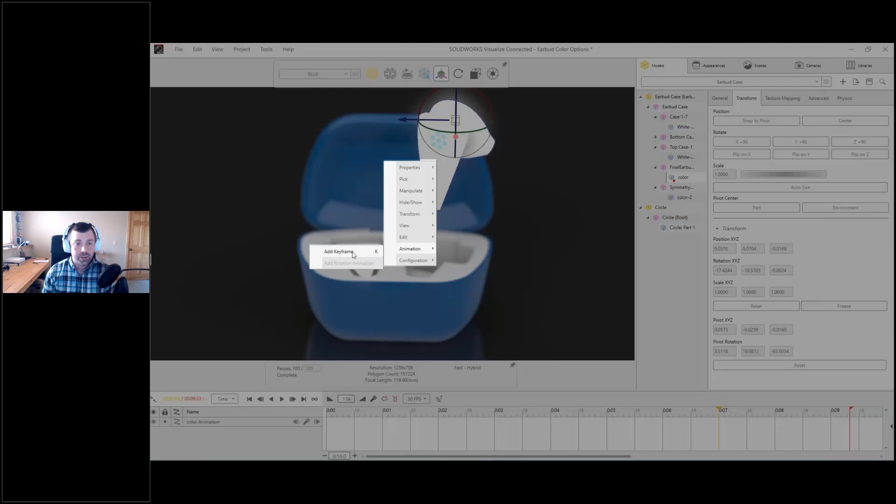Add animation, I just clicked on the earbud and said, add animation, or add keyframe, or the hotkey K, simple enough, K for keyframe. We'll plop that right down to the bottom, and you can actually see that come up as we go through. So it puts it into position right at 7 seconds.

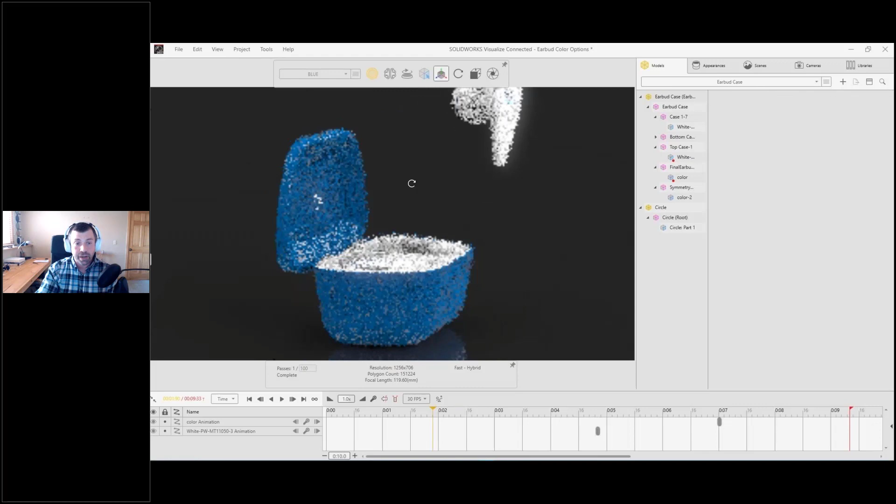And what I'm doing is I'm going backwards. This is where I want my animation to finish. So case open, earbud out. We'll do the same process. Let's move that. We'll do a keyframe for the actual case back.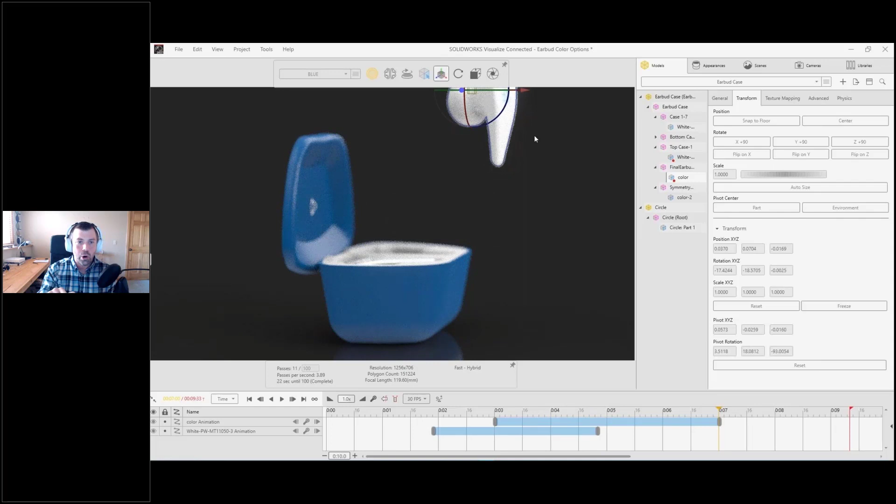And then what I'm going to do is come into the geometry side on the right and just reset it. So Visualize remembers where the position was when it was imported. This makes it really easy for me to roll back and just say reset, go back to your home. Creates the keyframe of that position, and then we can start to slide through and see how it looks.

Now, I don't love that it's kind of coming forward on the case, so I just updated the keyframe, and it does that automatically. I just move that back into position, toggle that through. Again, we're rendering in real time, and we can see this thing come together.

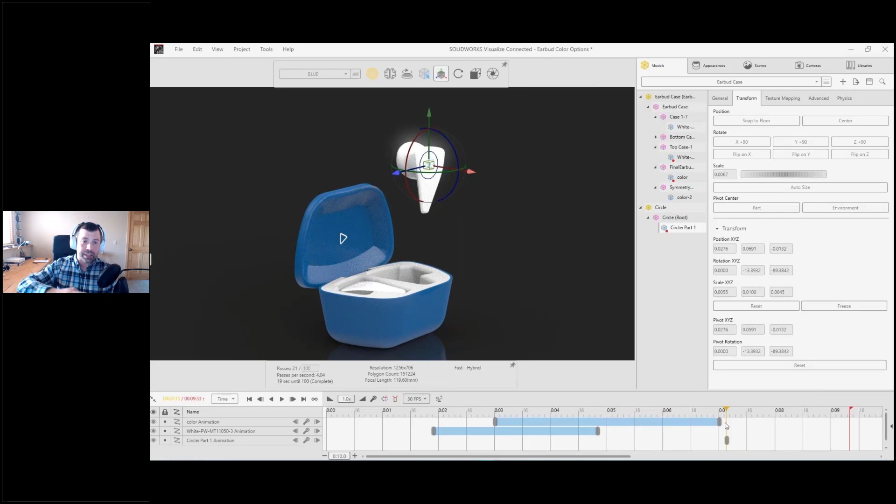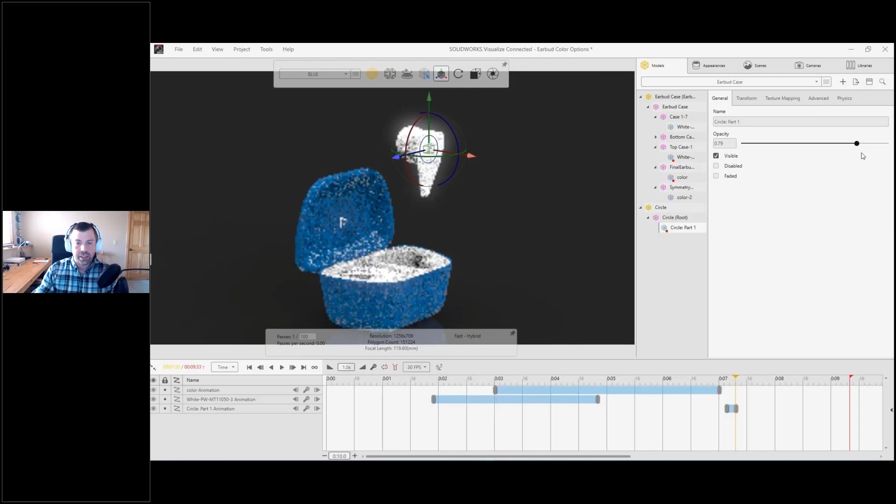The last thing I want to do—I could keyframe that fake LED to come with it, but instead I said why don't we just turn it on? We can keyframe all sorts of properties: camera properties, appearances, change red to blue to green and so on. In this case I wanted to keyframe out the opacity so it looks like it's turning on as we bring it out. So start at 0 opacity, then a fraction of a second later ramp that up to 100. Now it's up there, it's just hidden, and as that comes into position we'll turn on that LED.

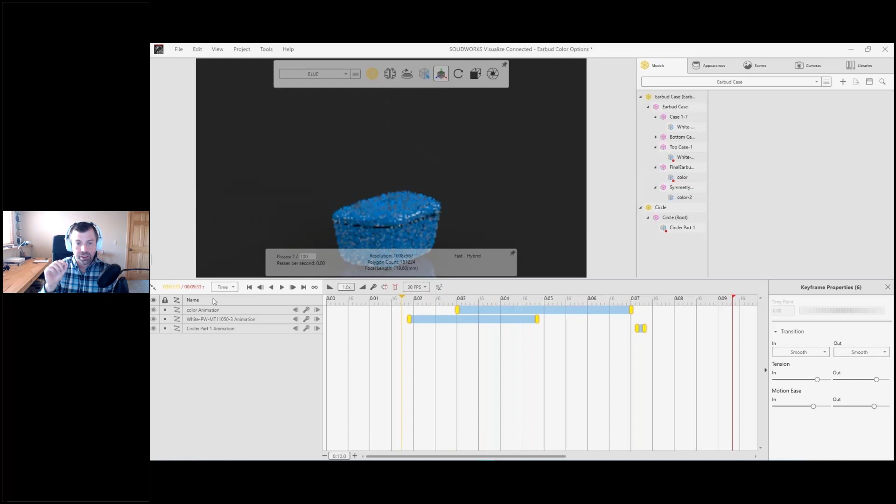From there I'll just add one last little thing. Here's a little pro tip: motion ease. This accelerates and decelerates the motion as it comes in. You can apply more of those advanced animation tips to each of the keyframes, really common in animation tools. I like to always add that, it makes it less jerky.

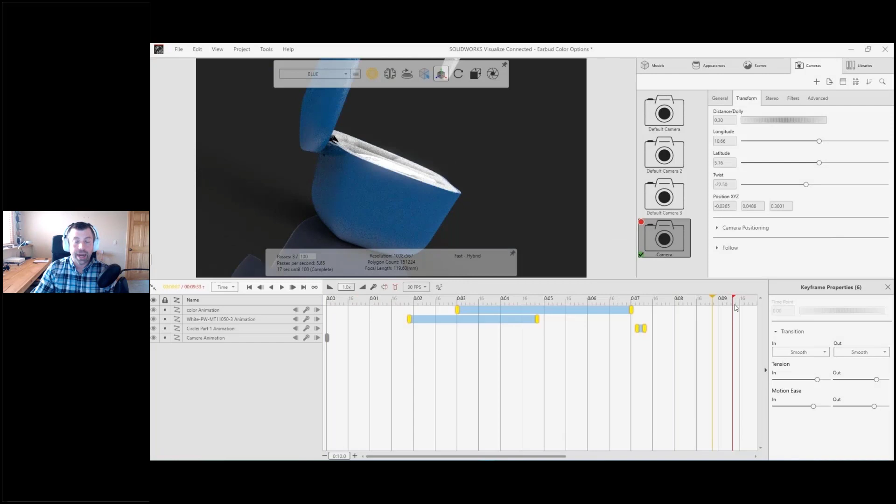Now we'll go through and start to keyframe the camera itself. I'm going to add a little bit of a twist to the initial part. Same thing, K for keyframe on the camera, or right click and grab keyframe. That brings a new item into the timeline. We'll roll to the very end and get rid of that twist, just using my mouse to position where I want that final image to be, that holding place. And just like that, the animation's done.

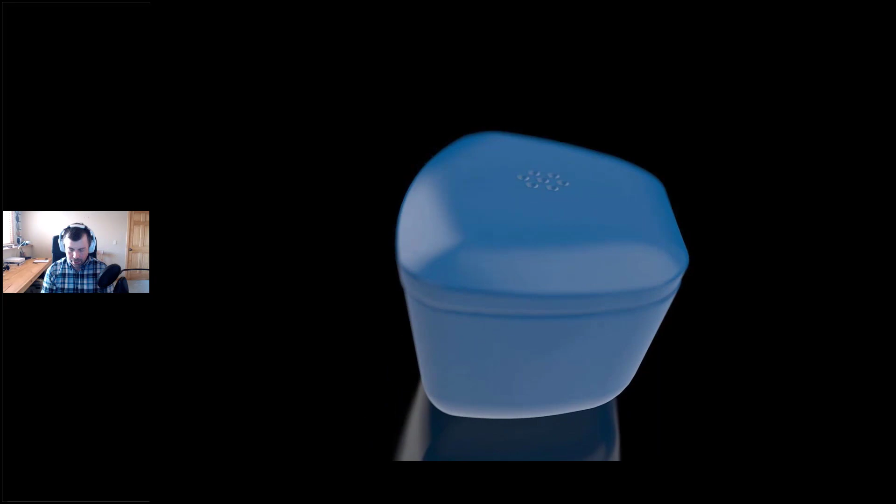What do you think, guys? Are you happy with it? Incredible. Did I do a good job? Above and beyond.

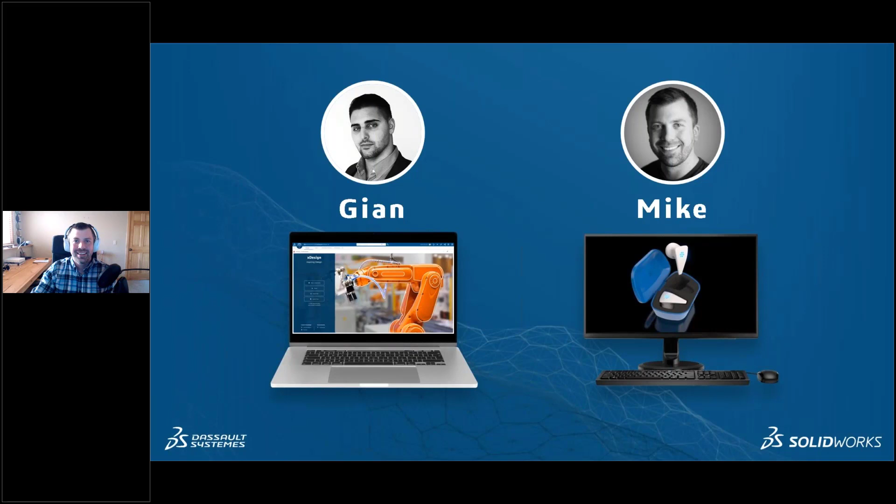Well, thank you so much, Mike, for coming in. That was a super engaging presentation, I learned a lot. Thanks for having me, it was fun.

Yeah, absolutely. So just to recap for the audience: photorealistic rendering was honestly so much easier than I thought it was. I thought it was so much harder—product configurations, and we threw in some collaboration as well. And of course the icing on the cake was where Mike went the extra mile and created that stunning animation using keyframes. So all pretty easy to use from what I thought too.

So Gian, do you want to give us a quick design recap here? Sure. Reiterating from the beginning, for this design we used a combination of 3DEXPERIENCE SOLIDWORKS in conjunction with 3D Creator and 3D Sculptor. We were able to reference geometry from either CAD app in the other, and we created the earbud in the cloud completely, then used it as a reference in 3DEXPERIENCE SOLIDWORKS to build the case around it.